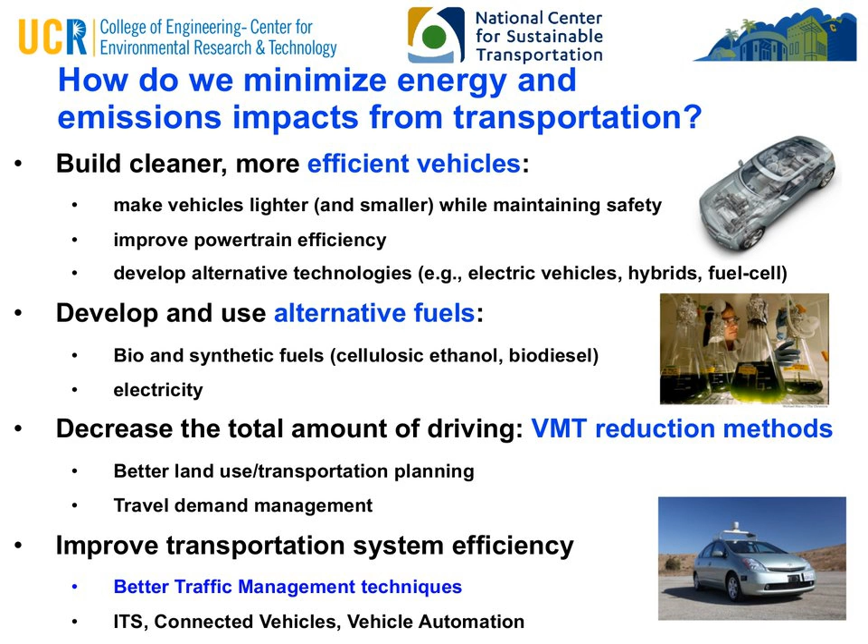And a lot of times this gets kind of lost. I mean, we don't realize how inefficient our transportation system can be unless we're stuck in congestion. We're saying this doesn't make sense. And so really by putting into place different ITS applications and related connected and automation, there are a number of different avenues of reducing CO2 as well as the pollutant emissions. And so really that's the topic of the white paper, more or less giving a survey or a general view of what's being done now and trying to quantify a little bit better in terms of what kind of reductions we could expect from implementing these different ITS techniques.

One thing that we always look at when we create these emission inventories is, you look at a number of different things. You look, of course, at the fleet themselves, right? The different types of vehicles that we use to get around and move people and goods. We look at what type of activities are they doing. Are they doing a lot of work trips? Are they doing a lot of highway driving versus arterial driving? And all that has to be pretty well quantified. And then lastly, what are the actual emissions that come out of the tailpipe? And that has to be measured as well. So if you put all those together, that's how you come up and quantify what is the total emissions inventory from a particular amount of traffic.

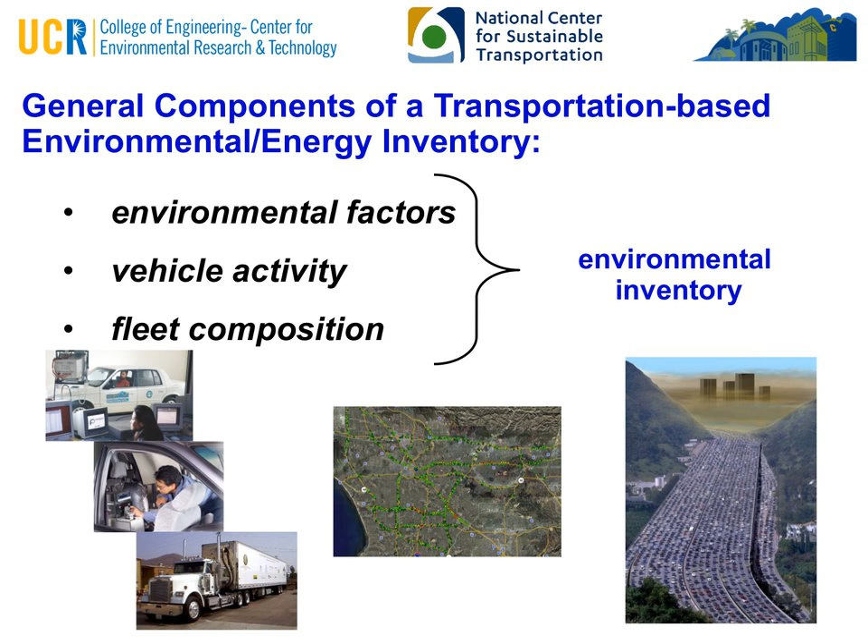And one thing we do to model this, there's a lot of ways, all the way from these larger macro scale models to detailed micro scale models that model individual vehicles. But a common thing that's done is looking at the relationship between energy and emissions as a function of, say, a traffic parameter such as average traffic speed. And I think a lot of people might have seen these type of curves before.

If you look at, for example, CO2 emissions in terms of grams per mile, you get high levels at the far left end simply because you're not moving very quickly, you're spending more time on that length of road. It comes down and minimizes somewhere around 40, 45 miles an hour, then starts to go back up, and that's mainly because of aerodynamic forces and things like that.

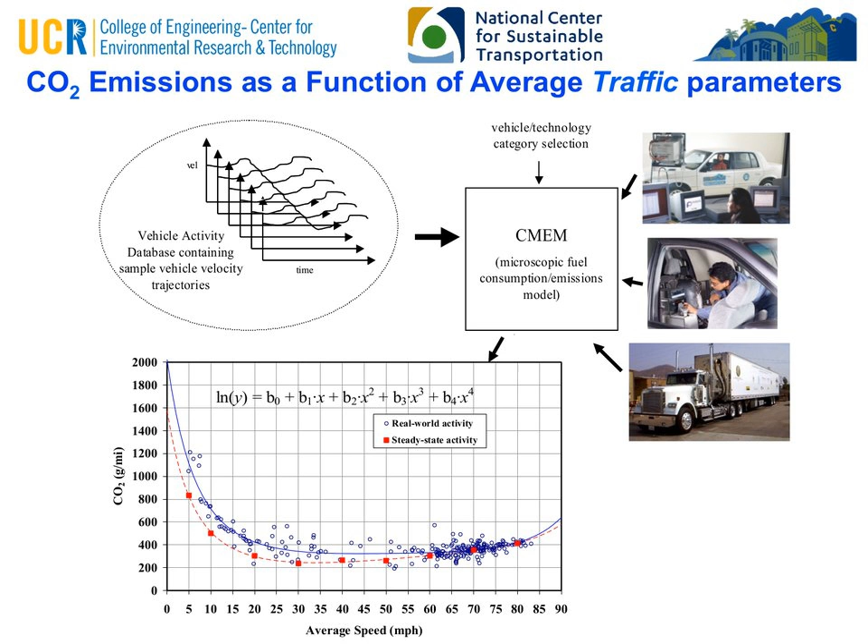So the graph that we're looking at here is real-world data where you can measure individual trips, and every point on that graph corresponds to a trip for a lot of data. And then if you do a line fit to the data, you sort of get those typical curves that are used for mainly looking at what is the relationship for something like average traffic speed.

Then if you now look at what can we do from an ITS perspective, this is a somewhat complicated slide, but it's again the same curves that we look at. The blue parabolic line there indicates sort of the typical average emissions as a function of speed for traffic. Again, high on the left end and then tailing up on the right end as well.

The dashed red line in this case is what's the minimum of what you could do. So if you were traveling at that speed, perfectly steady state, that's going to be your minimum emissions for that particular point. And so the reason we highlight those two things is, we'd like to categorize what you can do to reduce from ITS. You can do congestion mitigation strategies.

These things include ramp metering, signal synchronization, better incident management, and really that's taking things from these congested states and hopefully driving it to where traffic moves a little bit faster through the traffic stream, and because of that you get a net CO2 benefit in this case.

On the other tail end on the right side, if you want to reduce emissions, you can do things such as intelligent speed adaptation, different things where you adjust the high-end speeds so that they're not as impactful as they would be in typical driving. And so there are different speed management techniques that can be employed.

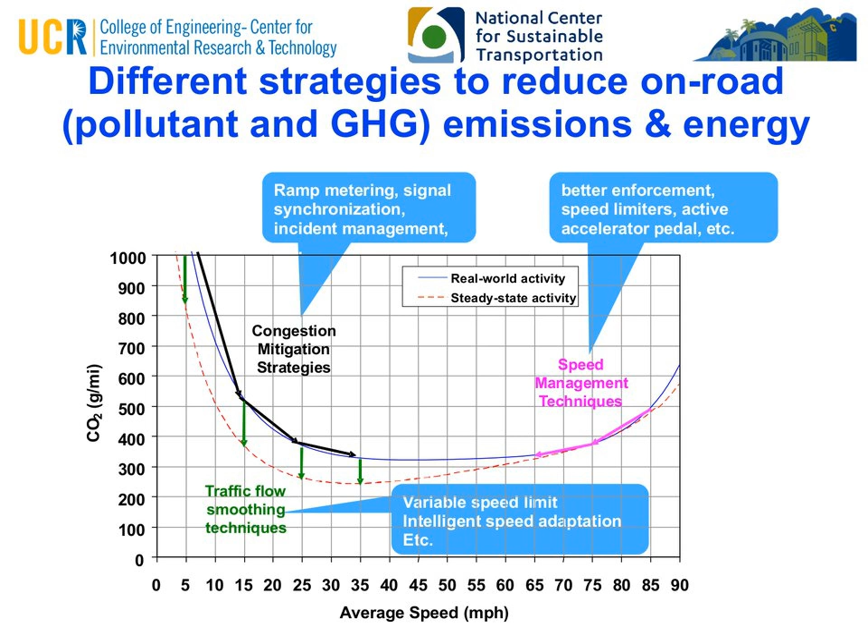So what this provides is a way of quantifying. If you simply take the average speed as a factor, you can quantify that way. And then if you want to get more detailed, you can look at acceleration rates and things like that to get even more precise answers. But this is a general methodology that a lot of people tend to use.

Okay, if you look at ITS research areas, we always like to look at it maybe from a vehicle perspective, a system perspective, and then a human behavior or driving perspective. And there's different parts of ITS that correspond to these areas. One is advanced vehicle control and safety systems. These are the things that we hear about on a lot of the television commercials about adaptive cruise control, crash avoidance systems, longitudinal lane keeping, all these types of things.

Then on the system side, it's more your traffic management systems, right? So that's monitoring traffic through sensor systems and then detecting things like incidents and congestion and then doing something to mitigate it, which may be ramp metering. It may include incident management, different things like that. So there's a number of applications that fall under that systems category.

And then lastly, it's driving behavior. And we look at advanced traveler information systems. So this could be things like better navigation, smart parking, different things that can help the actual traveler or the drivers conduct their trips more efficiently.

And so when we look at energy and emissions, we often see a lot of these ITS things seem pretty naturally beneficial for reducing energy consumption and reducing emissions. And we do ITS for several reasons. We do it for safety. We do it for mobility. And when we create ITS that's targeted at safety and mobility, we often get this energy and emissions benefit as well. We refer to those, at least in the white paper, as indirect effects.

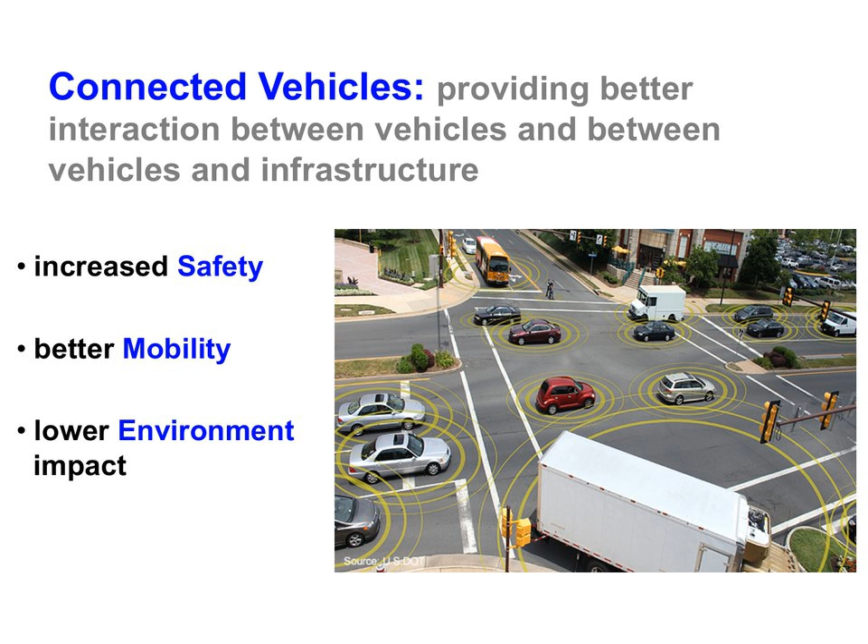So connected vehicles in itself is a major part of ITS, right? It's the whole concept of communicating vehicle to vehicle or vehicle to infrastructure, or even extending it to vehicle to X to have a lot of type of communication going on. But again, the idea is usually focused on what applications improve safety, what can we do to improve mobility, and then what are the environmental applications.

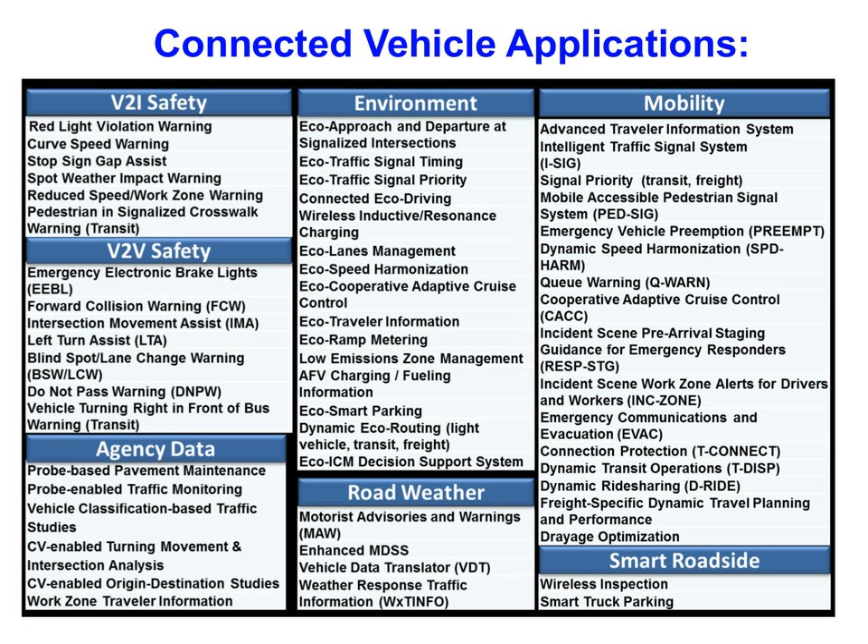But one of the major things that we participated in was the U.S. Department of Transportation AERIS program. AERIS stands for the Applications for the Environment: Real-Time Information Synthesis. But this was really trying to come up with these concepts of what type of connected vehicle and ITS programs can we specifically put into place that is targeted at reducing energy consumption and reducing emissions. So there was a lot of applications. A lot of them are listed here.

Many of these have to do with traffic signals. So when you go down an arterial corridor and you encounter traffic lights, there's several applications that were studied in great detail. One of the key ones that we'll talk a little bit more about here is this eco approach and departure at intersections. So I'll give details on that in just a moment. But it's also optimizing the signal timing, again, for energy and emission reasons, and there are some synergies with throughput, traffic signal priority, connected eco-driving. All these things, again, tie into the traffic lights.

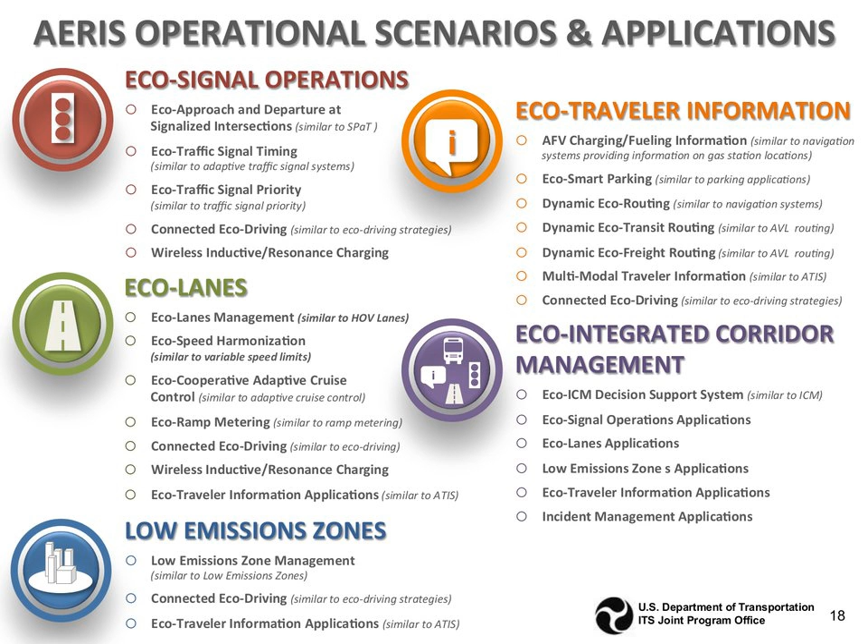Then on the other side, there's applications dealing with maybe more on the highway lanes or freeway lanes, things like eco-speed harmonization, cooperative adaptive cruise control. All these were studied in depth in terms of seeing what could they potentially do for the energy and emissions benefit. And then others, you can see the eco-traveler and eco-integrated corridor management. So again, the ITS program has a very good website. So if you wanted to dig into more details about these applications specifically, that exists, and it's outlined also in the white paper.

So let me just highlight a few, again, simply because we did quite a bit of studies both in simulation and in real-world demonstrations and testing. So this eco approach and departure is fairly straightforward. It's just simply sending signal phase and timing information from the traffic light to the cars.

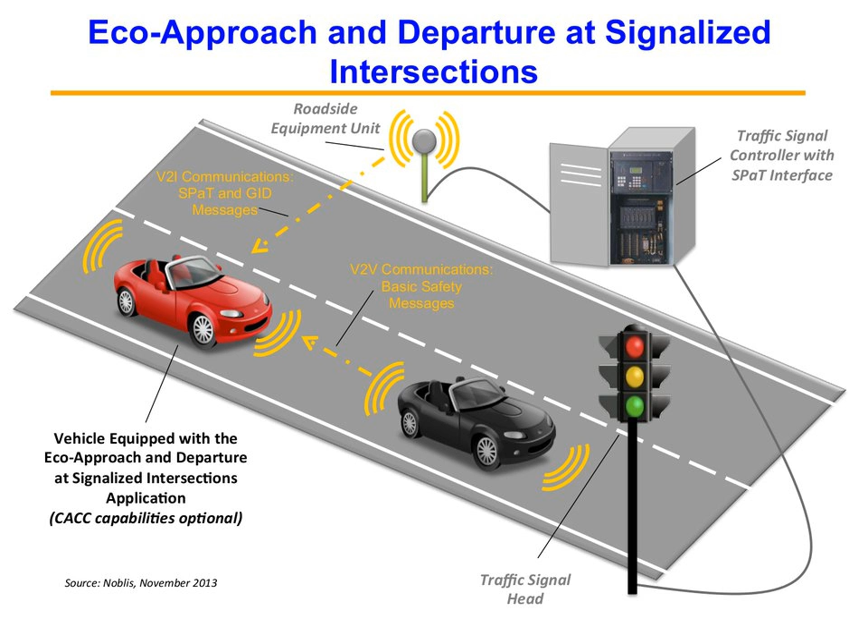And what that allows the cars to do is to listen and anticipate what the phase changes are going to be, and potentially changing the speed of the vehicle, either to get through the light under a green condition, or maybe slowing down if they know they're going to have to come to a stop anyway, or even safely speeding up a little bit to where you can get through the intersection on the green. And so this is the general diagram of how that works.

If you look at a speed versus distance diagram, it kind of outlines the 4 different scenarios, kind of what I just mentioned. If you're cruising at the right speed and you're going to make it through the green, you don't have to do anything in terms of changing your speed. So that's scenario 1. Another scenario might be to safely speed up a little bit so that you can make it through on green. Another one is where there's no way you are going to be able to get through. You are going to have to stop, so maybe you want to slow down sooner.

And then that last scenario might be where you slow down a little bit, stay at a lower speed, get through the green light, and then move forward from there. So it's really just planning a better trajectory for the vehicle as you approach the intersection, and then when you depart, it's getting back up to the traffic flow speed.

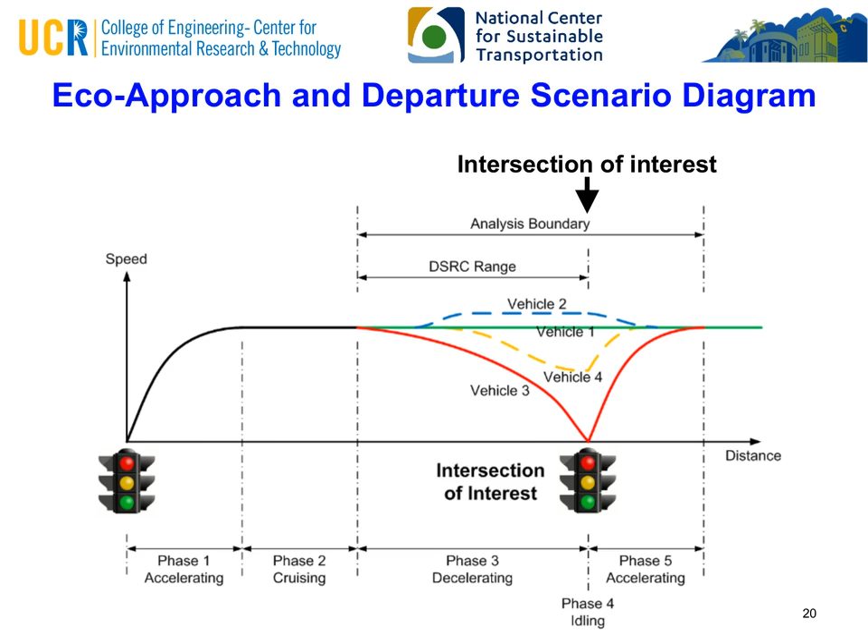So there's a lot of variables to this. The signal timing scheme, whether it's actuated versus fixed time. You can plan for single intersections versus multiple intersections. How well it functions depends a lot on congestion level. As you can imagine, if things are very, very congested, this application isn't going to do much for you simply because there's not a lot of room to speed up or slow down.

And then another middle point there is, even if you have a small percentage of vehicles that have this capability, you still get a pretty significant level for all traffic. And so we documented cases where just a smaller percent, maybe a 20% penetration rate, can lead to actually a slightly greater benefit simply because cars following other cars that have the technology are also kind of moving at the same traffic flow and getting the benefit.

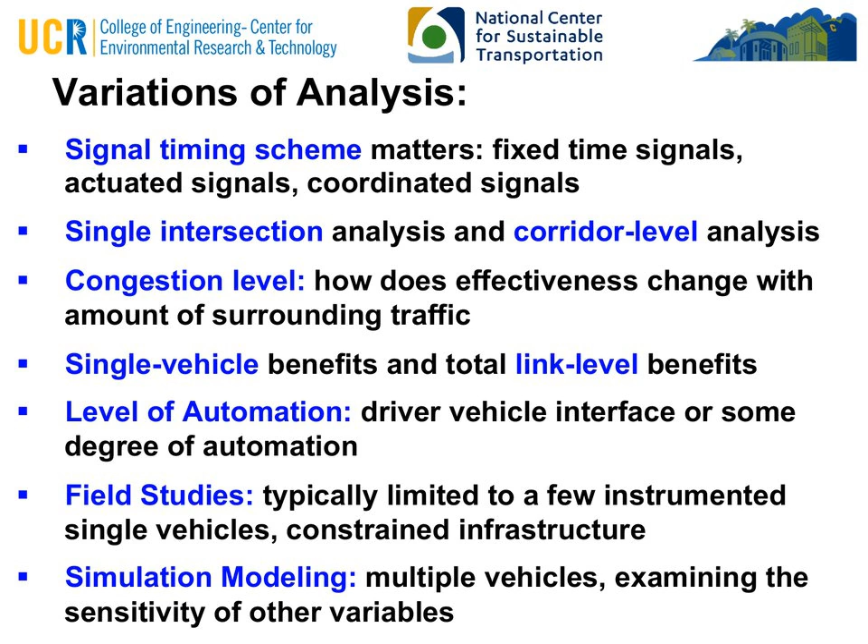Automation is an issue, whether you want to do this through a driver-vehicle interface versus some kind of automated techniques, and both types of experimentation have been done through different field studies. So the key upshot of this is that, even with all those different variables, the typical answer is, by doing this, you get a 10 to 15% fuel reduction benefit, and that's on an individual vehicle level. But then depending on the penetration rate, that's all of the traffic that's getting that type of benefit.

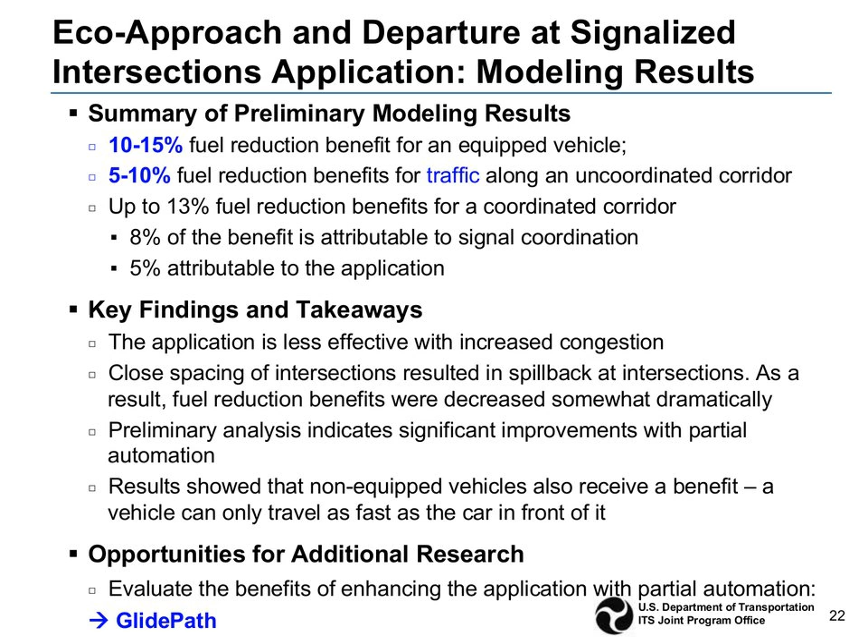So as I already mentioned, with heavy congestion, it doesn't perform as well. So usually light to medium levels of congestion is where it's pretty effective. And there's been several tests of this. Some have been at the Federal Highway Turner Fairbanks Research Center. And there's also been some testing in California on El Camino Real up in the Palo Alto area. One project that recently took place is the Glide Path project.

Glide Path was doing this eco approach and departure, but using a partially automated vehicle. So rather than telling a driver, this is the speed you want to go at, it basically, like adaptive cruise control, adjusted the speed of the vehicle automatically, and did that in a way that was safe, and if the driver wanted to take that out of the automation, he could take over the car at any time.

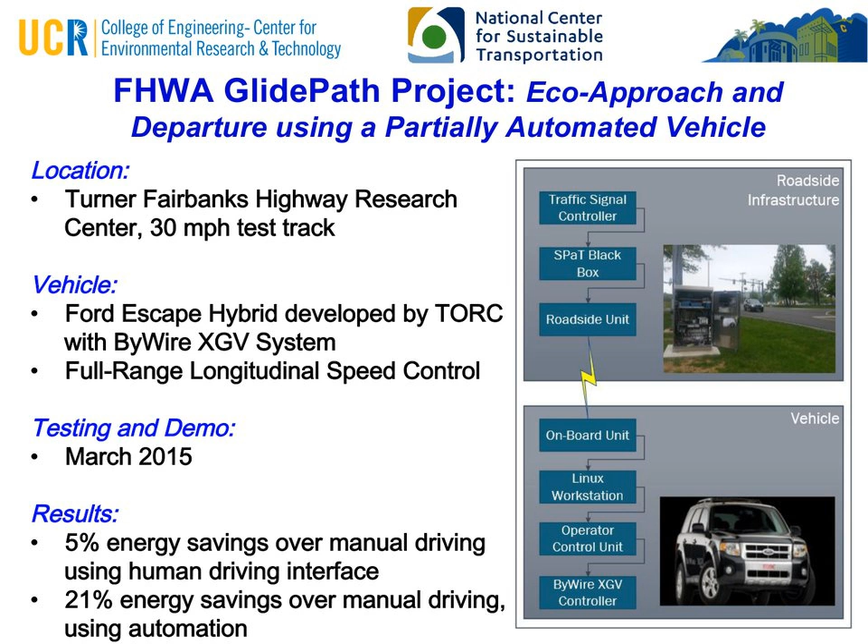The results from this test were pretty significant, where if you compare an automated eco approach and departure, that was roughly 20% more beneficial than just manually driving through intersections. And then if you look at using a human driver interface versus manual driving, that was only, say, a 5% improvement. So we think automation has a pretty big role here, even this partial automation.

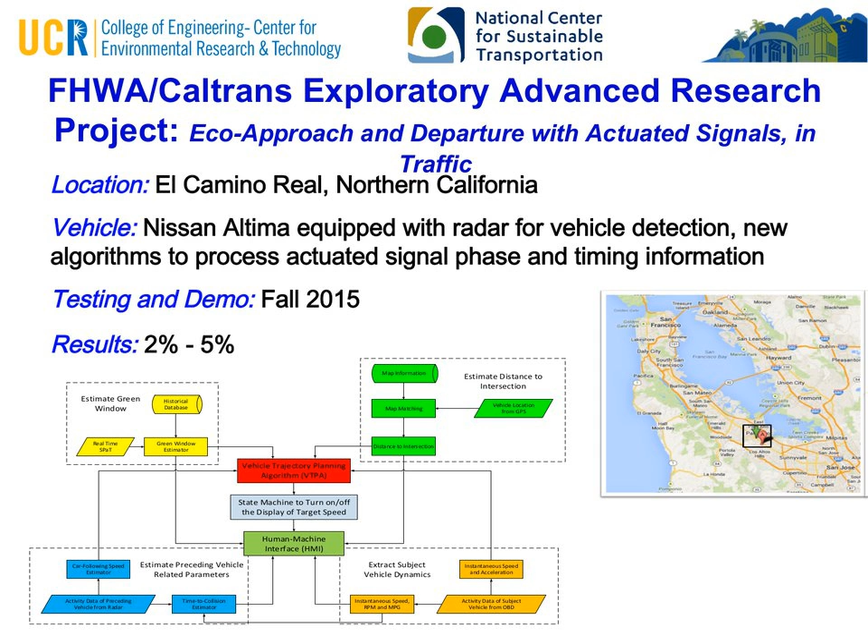This has been explored also looking at actuated signalization. This one particular test on El Camino Real, El Camino is fairly congested most of the time, so you can see that those results weren't too impactful, roughly 2 to 5%, again, simply because it's difficult to do the speed up and slow down when you already have these levels of congestion. And then I'll go through very quickly on some of the other example ones.

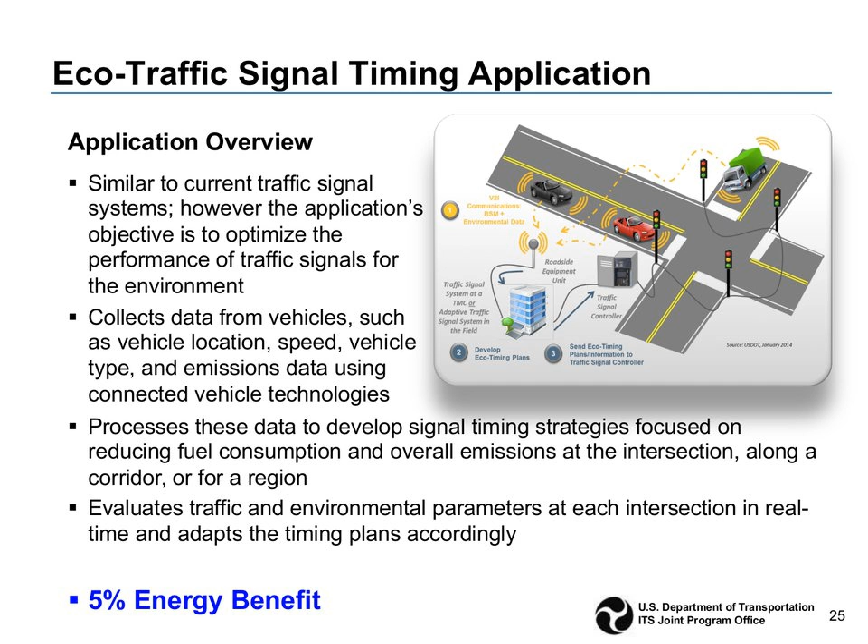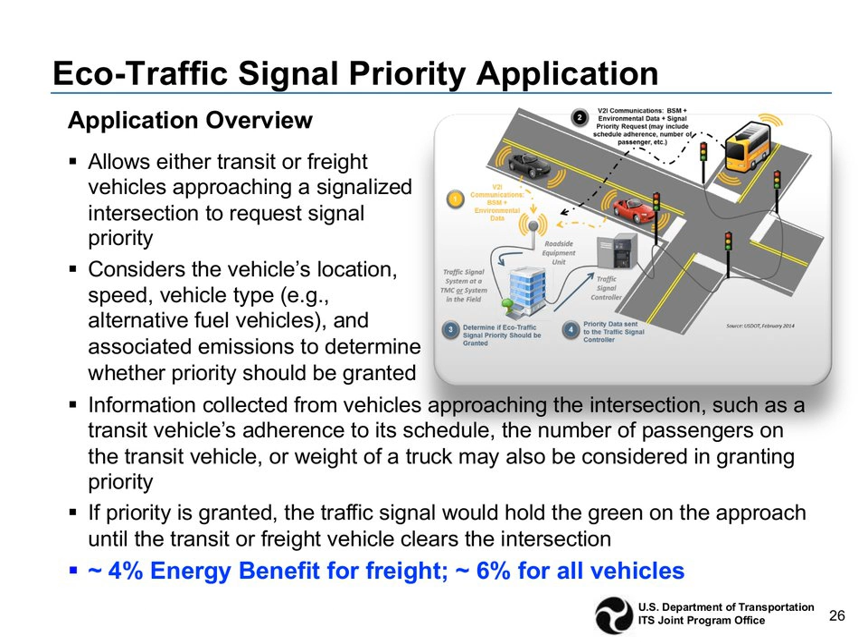Eco traffic signal timing. This is again tuning it, not necessarily just for mobility and throughput, but looking at specific energy minimization. And when you do that, we found a 5% energy benefit. If you look at traffic signal priority, and this isn't necessarily just transit, but you could do freight signal priority. So by doing that, you can get, again, in the range 4 to 6% energy and emissions benefit by implementing these signal priority schemes.

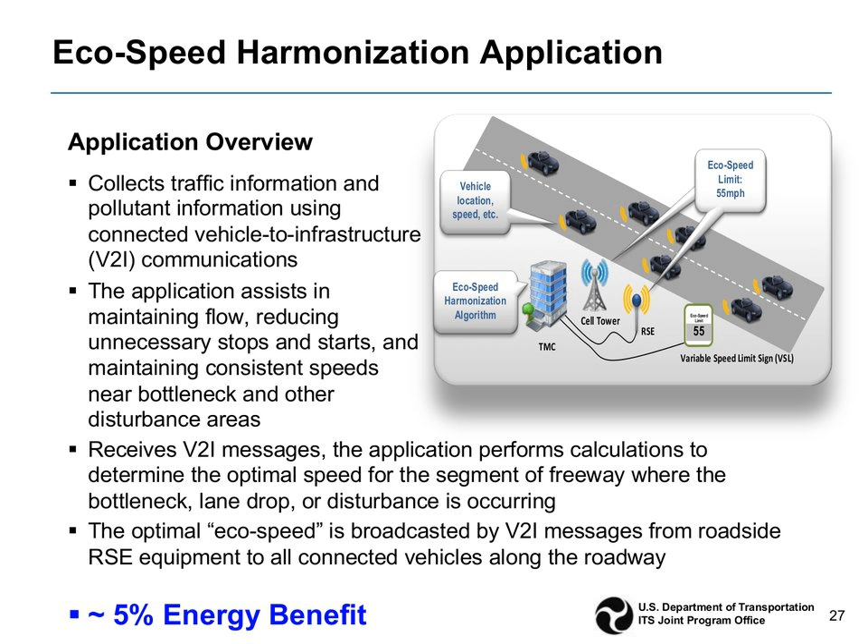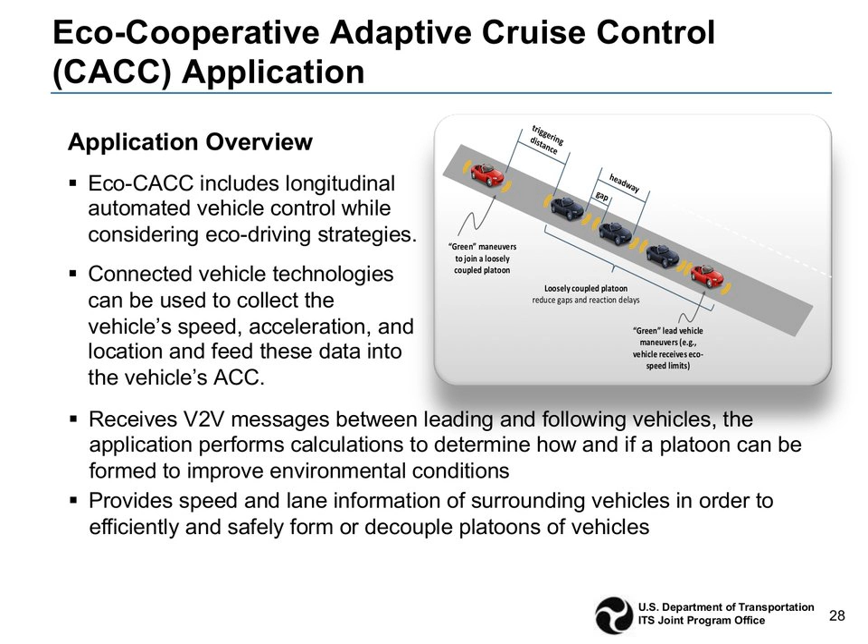Speed harmonization. This is where, if you provide vehicles speed advice on, say, our freeways, and do that in a way where it's anticipatory, where you can get vehicles to mitigate the shock waves, you can get some interesting results there. A lot of the simulation work we did was right around 5%. And then you can extend that even further with cooperative adaptive cruise control, which has pretty significant benefits depending on the number of vehicles that have this technology. This is one where we saw sometimes 20, 30, even 40% benefit depending on how you implement this CACC.

Okay. So, in summary, if you look at all these AERIS applications, these are kind of the general results of what we've just talked about. And again, there is some continuing work in these different applications. It's really coming up to where we can document what the potential benefits are.

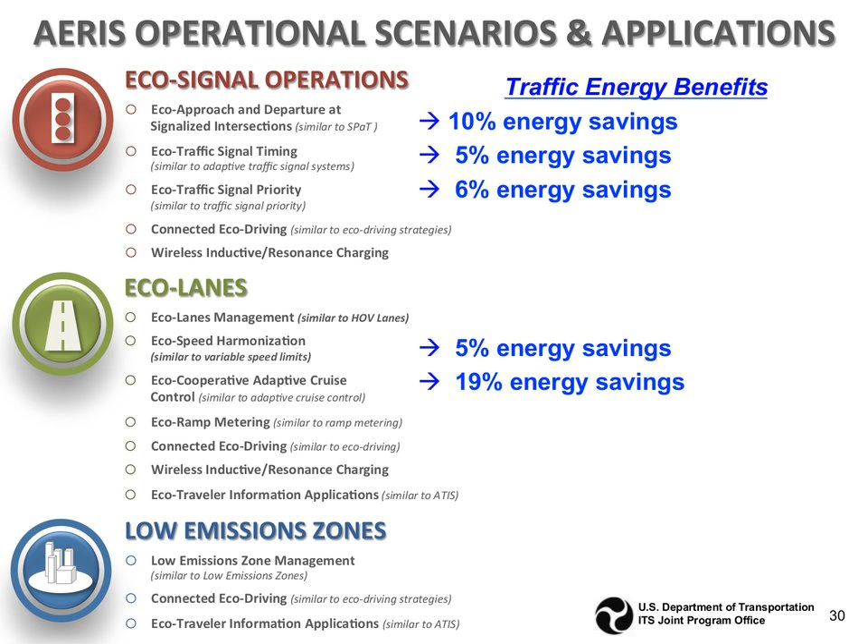And then we already mentioned this whole idea of connected vehicles and then pulling in these automation steps. And the key point I wanted to make here is if you just simply do autonomous vehicles, you might not get the great environmental benefits that you would expect. But when you start to pull in the connectivity, so you have connected automated vehicles, that's really where the potential is in terms of getting the energy and emissions reductions that you want to get.

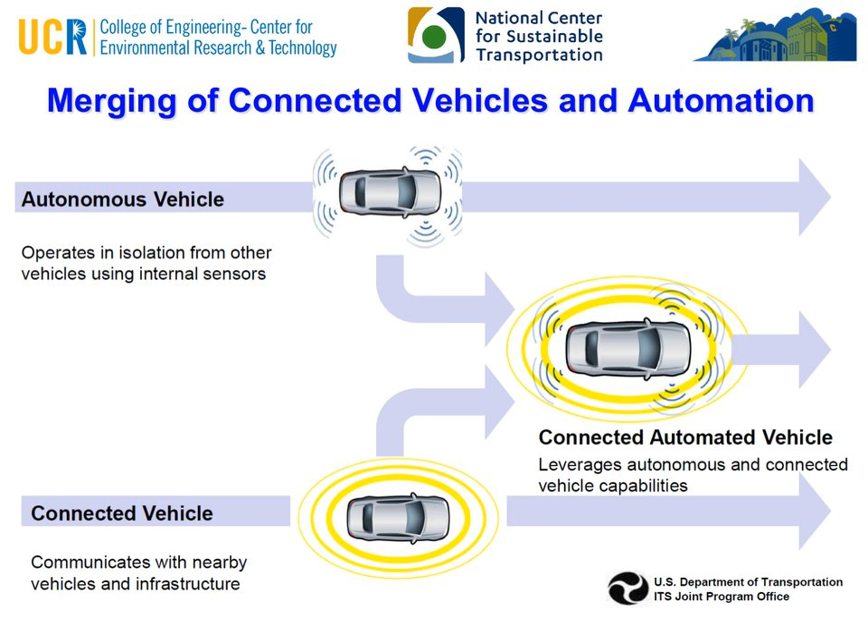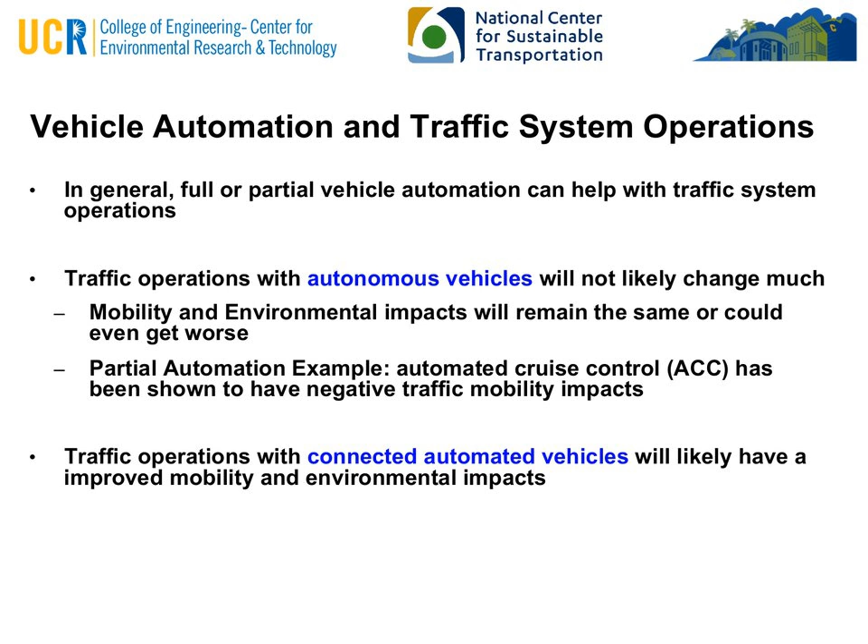So again, when we look at things such as the Glide Path project, that was a very good example of why partial automation, along with that connectivity, getting the traffic signal information, pays off together in a nice connected automated vehicle experiment. Maybe towards the last point I'd like to make, and also it's touched on in the white paper, is it's not just going to be a vehicle and a systems perspective. It might turn out also to be an infrastructure issue.

We're familiar with all sorts of different intersection management systems, all the way from stop signs to traffic lights. There's been a lot of demos that show if you have communication, then you can get away potentially with an intersection without any traffic lights, as long as everyone's communicating and speeding up and slowing down so they don't crash into each other. So that's been demonstrated. But those systems are very fragile, right? If you have one or two vehicles that don't have that technology, it tends to break down and have some issues.

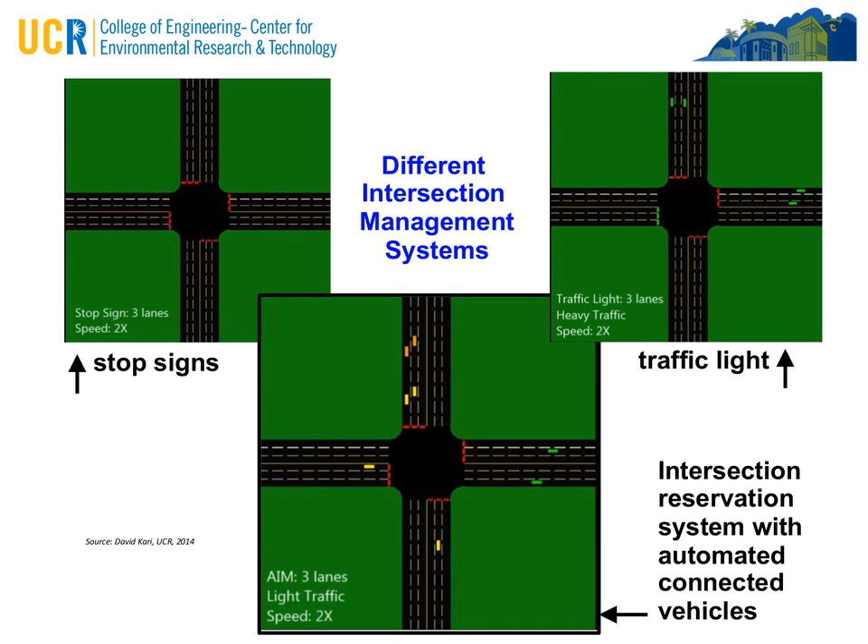But when we say we have these intersections and designs already, as we progress with more connectivity and more automation, maybe these types of intersections don't make sense anymore, and maybe things like roundabouts make more sense. And so part of what's been studied too is, if you look at these intersection designs, roundabouts have a lot of potential advantages and some disadvantages as well.

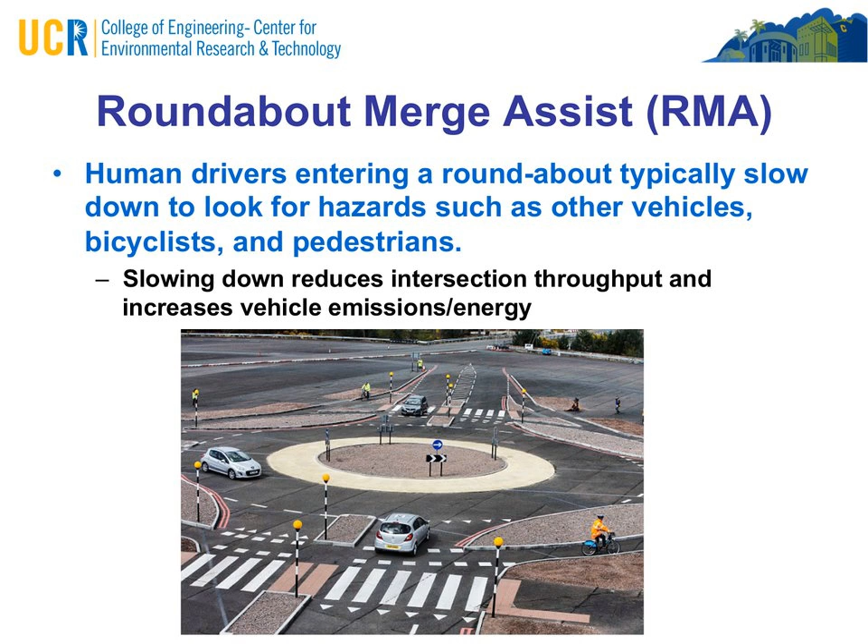So one thing is, when human drivers enter into a roundabout, there's a certain point that the total volume slows down simply because humans don't necessarily merge well together. I mean, they perform the merge events, but they slow down quite a bit to do that. And so you have this potential of, if you could help automate these merging and lateral maneuvers, you could potentially get a lot better performance in terms of throughput with roundabouts.

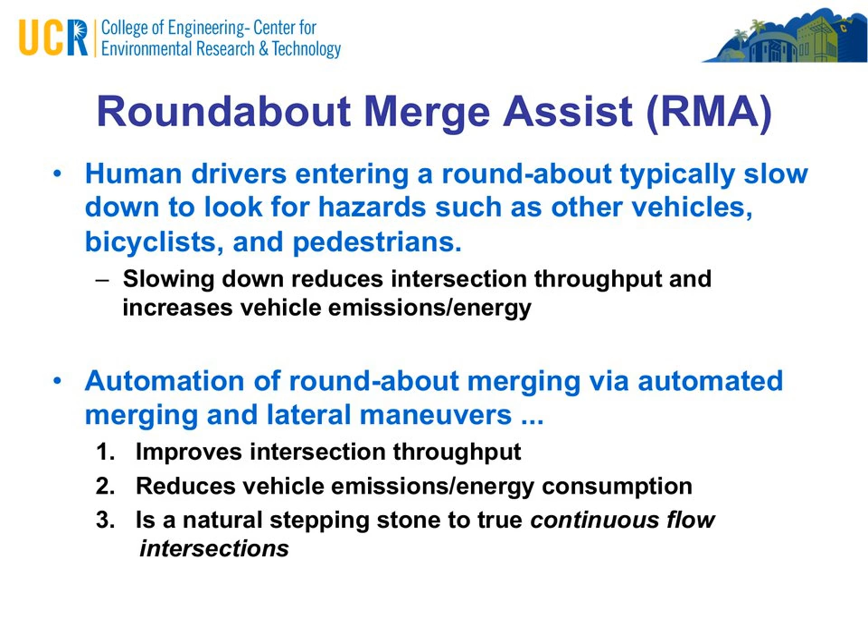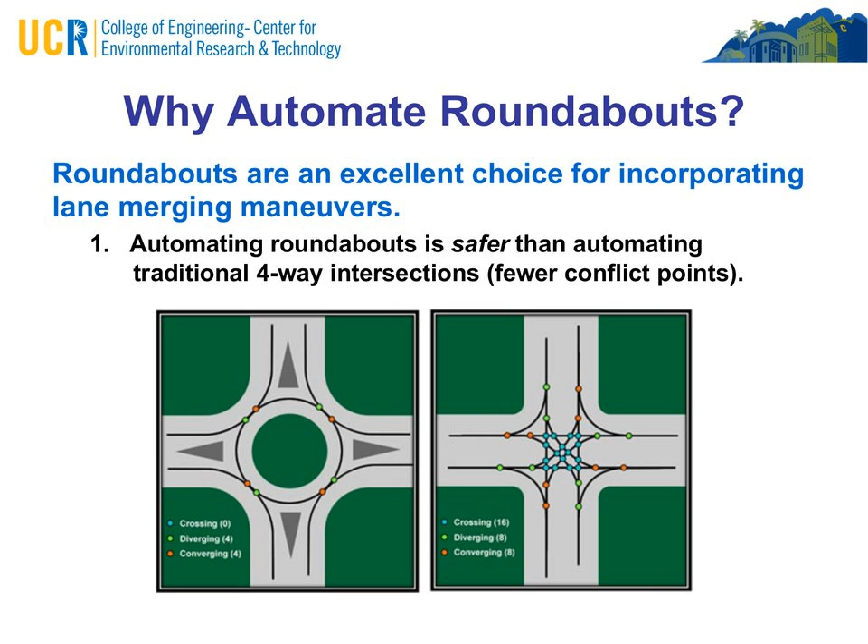They're also a lot safer. If you look at conflict points, whether they're crossing conflicts versus diverging versus converging merge points, there's a lot of these within a typical four-way intersection, whereas with roundabouts there's a lot less. And so there's a big safety benefit there. Again, emphasizing reducing the number of potential conflict points, especially if you were considering this fully automated intersection without any traffic lights.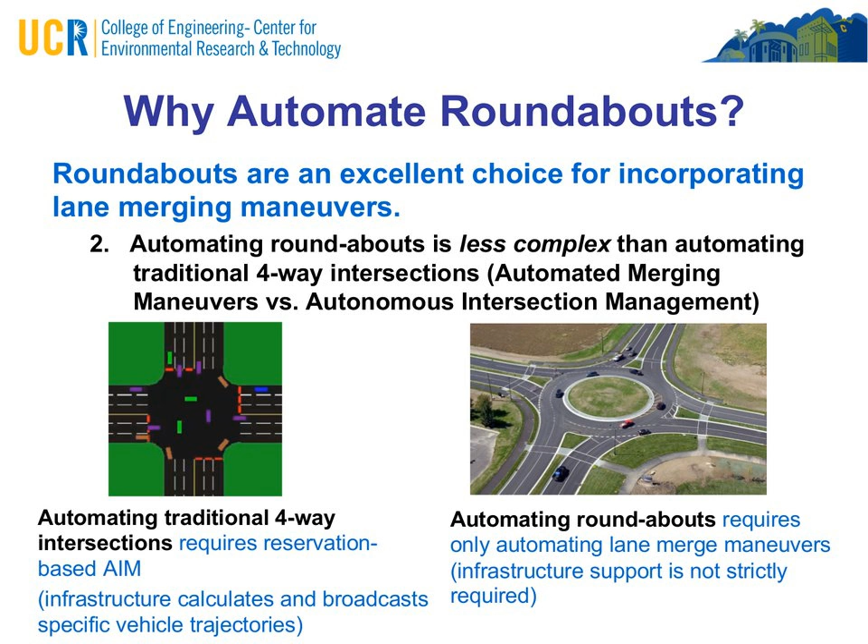But then if you introduce things like partially automated merging and things like that, you can still do well with the roundabouts. And that's what these simulation studies told us, is that you can push that volume quite a bit out, as long as you're now involving that connectivity and automation that would allow a roundabout to perform a lot better.

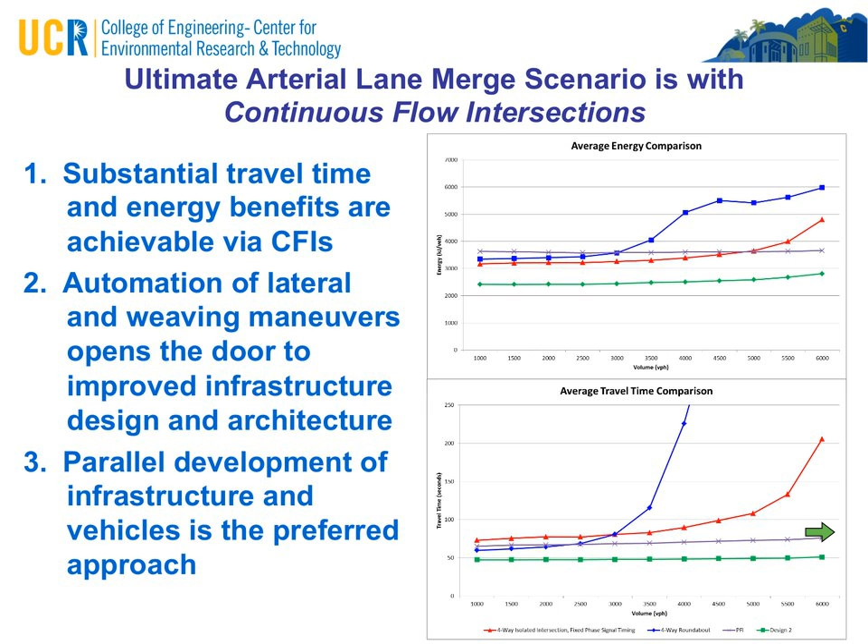All right. So maybe just to summarize at this point, there's always been these three general goals of ITS that focus on safety, mobility, and energy. And one of the takeaways is that there really has been the last 5 or 6 years a concerted effort to specifically target energy consumption and emissions. And we talked about the U.S. AERIS program, but also in the white paper we referenced the Japan Energy ITS program as an example, and the European Union has a number of programs, including EcoMove.

And then if you can evaluate each one of these and see these 5 to 10 to 15% benefits, some of them may be multiplicative. You can introduce a lot of applications and potentially add them up. There's going to be some overlap, but we think there can be a lot of potential if you implement several at once. A question that we get a lot is, if you are improving flow, are you going to potentially induce demand, which has, of course, a negative energy and emissions effect? And so that's something that's being studied as well. In the white paper, we haven't put too many results in there, but that's certainly a concern.

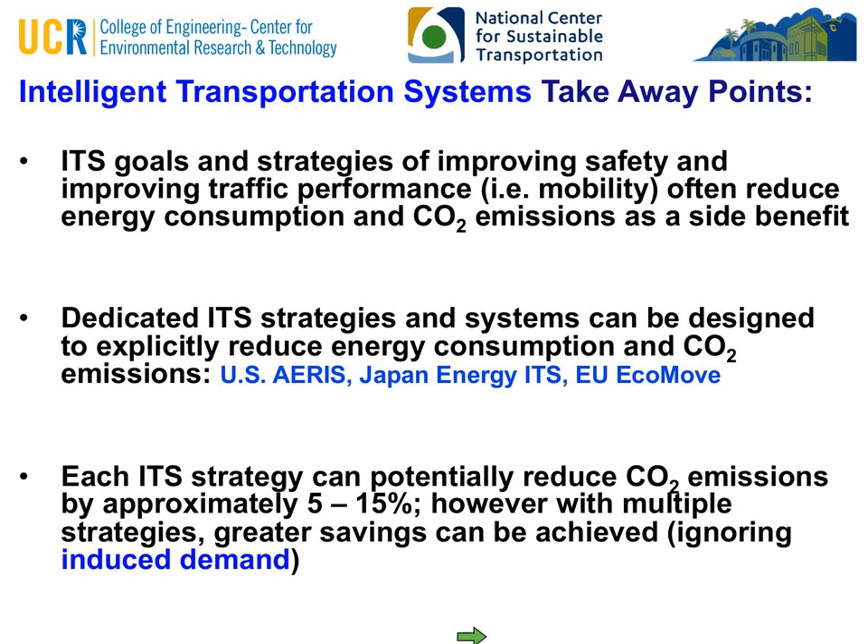As mentioned before, with ITS, we're often juggling these safety, mobility, and environmental things. And thankfully, there's a lot of applications that are co-beneficial, right? So if you do things such as a safety application that reduces the number of collisions, that's good for mobility, that's good for safety, and it's good for the environment. But then there could be some potential things where if you want to make things really safe, increase spacings between vehicles, that of course is a net negative for mobility.

And so one thing that we're doing as another white paper within the NCST is looking at these different trade-offs between safety, mobility, and energy, and seeing which ones are co-beneficial and which ones truly are trade-off scenarios. And so that's a white paper we expect to see later this summer.

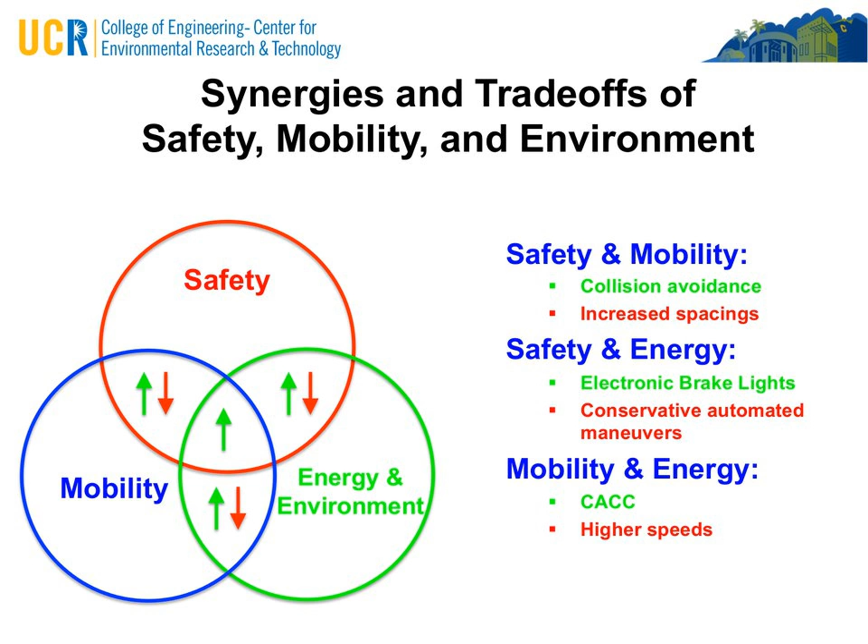And then lastly, with the automation, just to make the point, if we are going to just do autonomous vehicles where the vehicles simply have their own sensors and get around autonomously without doing much communication, there might not be as significant mobility and environmental benefits there. But if you introduce that connectivity, then we think there can be some very good benefits from that type of ITS technology.

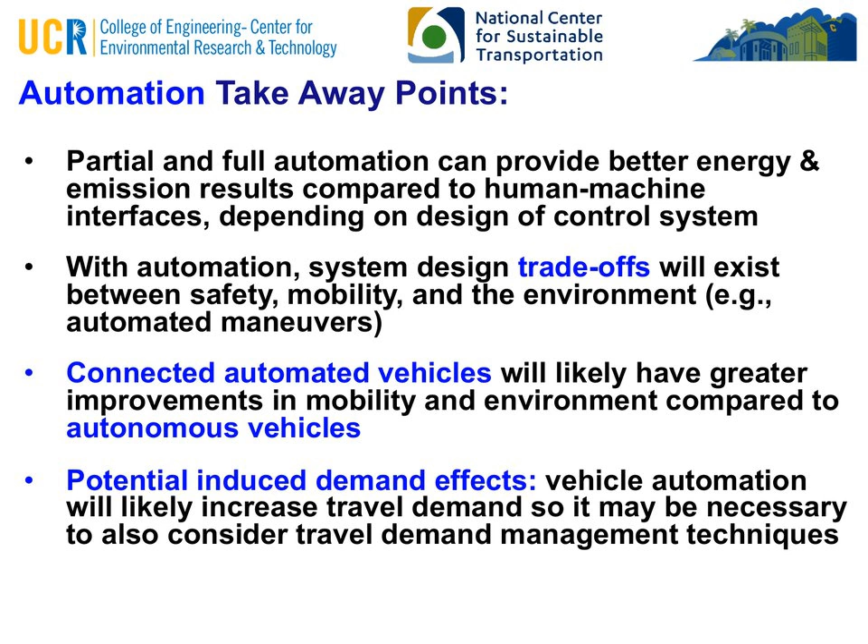And then, of course, back to the induced demand. When you introduce a lot of this automation, I think it's clear to a lot of people that there is the very high potential for increasing the amount of travel demand. So that's something that has to be studied and potentially mitigated.

So I think that's the end of the presentation. And again, I refer you to the white paper, and if you have specific questions about some of those applications, I can point you to some of the other websites and papers that address that.

So Laura, I'll go ahead and finish there, and we can have Samer and Marco talk. Great, thank you so much, Matt. That was a great presentation. So I am going to put Marco Anderson on the spot first to provide some of his thoughts and reaction in working at a regional transportation planning agency. So Marco? Sounds great. Thank you, Laura. Can you hear me? Yep, loud and clear. Okay, great.

So lately I've been talking a lot about automation and ITS to different audiences. So I have to preface this by saying that in some audiences, I'm very optimistic and really look forward to a lot of the benefits. In other audiences, I have to put my skeptic hat on and talk about some of the challenges. So just wanted to make sure that if I say some skeptical things here, talking to other people who don't believe that this is going to work or that this is a waste of money, I'm very, very pro-investment. So I think from the public sector side, there's a few different responses.

And what's interesting to me is that over the last 10 years, especially in California, we are really trying to implement a system where we are using policy to get public benefit out of a number of private market decisions. And so we see that in the plug-in electric vehicle arena. We see that in how we're approaching ride sourcing and shared mobility. I mean, these are predominantly private sector initiatives that we are looking at the benefits of, and then also trying to be aware of any sort of disbenefits or negative externalities that may come about.